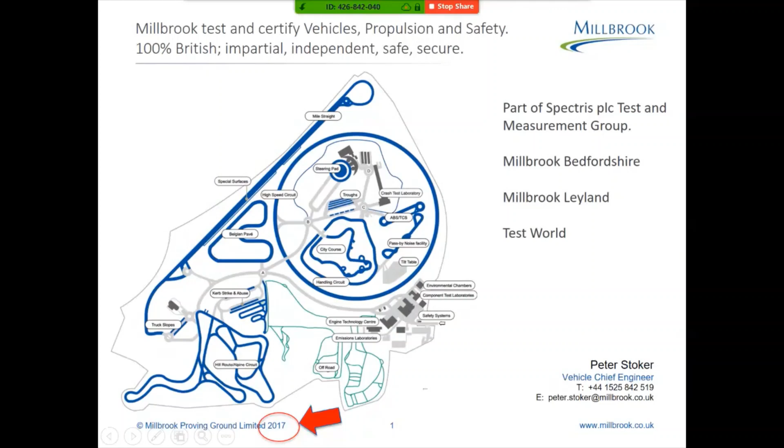So moving on, we had 2 significant government-supported testbeds on site at Millbrook. The first one, calendar-wise, was partially funded by the Centre for Connected and Autonomous Vehicles. It is a partnership in itself with the UK Atomic Energy Authority, and essentially sets up the UK's controlled urban testbed for connected and autonomous vehicles.

Within this deployment, we had some initial connectivity ideas where we would put together a series of enabled infrastructures being masts, power and fibre, essentially completing a lot of the civil work with a view to customers and infrastructure owners bringing their devices to put on top of that infrastructure.

However, the 5G Testbed and Trials program came along. We pitched at the event and were introduced to the guys from Airspan and asked if we'd like to be the location for the AutoAir project. And from small 2-slide presentations, mighty oaks tend to grow.

So in March 2018, we announced the participation of Millbrook in the consortium as the location for the 5G test infrastructure.

Things moved quite rapidly, and in July we hosted an inward visit from DCMS to look at some of the initial ideas and some of the advanced devices that were likely to be deployed. A very successful day in high summer of 2018, and from that we started to develop the site in earnest rather than just planning.

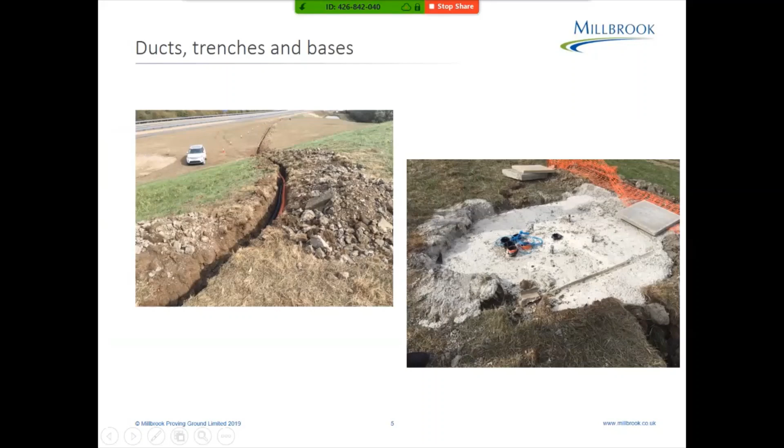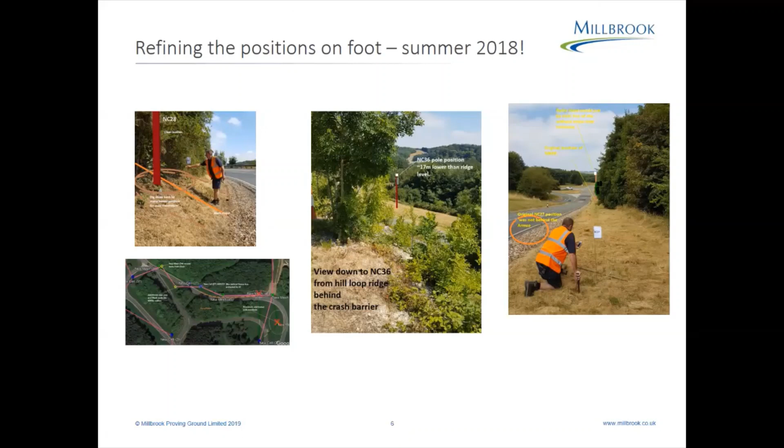Once some of the sites were in place, we looked at fine positioning rather than just what was on the radio plan, because we had to work with the architecture, the topography, and the tree lines that we had at Millbrook. We also had to look at safety considerations of siting masts in safe locations, not on the outside of bends where test vehicles could leave the track. It is a test track after all, and we didn't want any collisions with the surrounding telecoms infrastructure. So we tried to keep it as safe as possible, and this was a good part of working together to refine those positions.

In February 2019 we hosted a great launch event where we invited people from different industries, from transport and also from the technology sectors. We had a series of speakers, some really good high-level speakers, and ran demonstrations around the high-speed bowl at Millbrook. There were some great video feeds that went on to make BBC News and lots of publications, and we've used it in dissemination events ever since. There's a lot written about this demonstration day, which I won't repeat here.

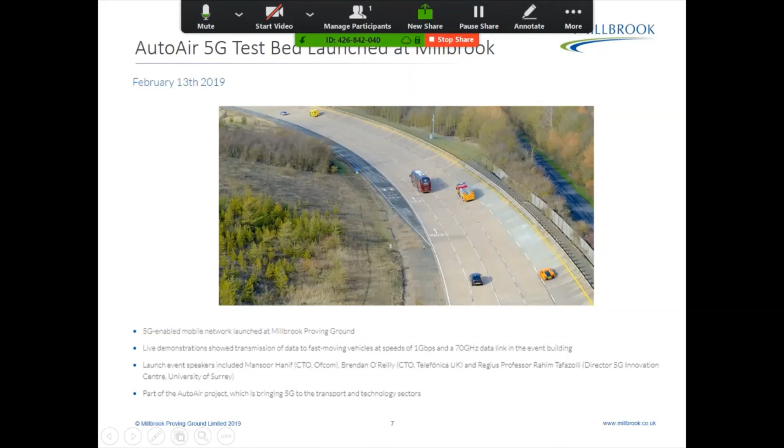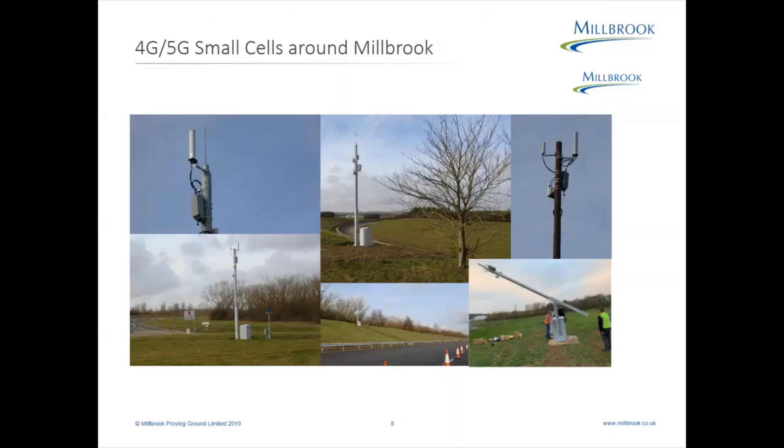Here we can see a selection of the small cells positioned around the site at Millbrook. The metal masts are essentially on the flat area that I explained earlier. The wooden posts we deployed into the hill area, and they blend very well into the agricultural background. The masts are tiltable for easy access, so if any devices are changed or people want to bring new devices, they can be added to the masts in a fairly straightforward way.

So using the AutoAir network, Millbrook have developed this in-house ability to look at the data live, and we can stream this straight to the engineer's desktop in the office. We can show it to customers in a confidential conference room, and obviously we can record it as well.

So in this way we can do plausibility checks on sensors, and we can keep a live eye on vehicles that are driving around. We can raise any flags if there's any issues also. So this has been very useful to us and now forms mainstream vehicle testing. So we're doing this on durability vehicles and on customer measured vehicles as they drive around on unique tests.

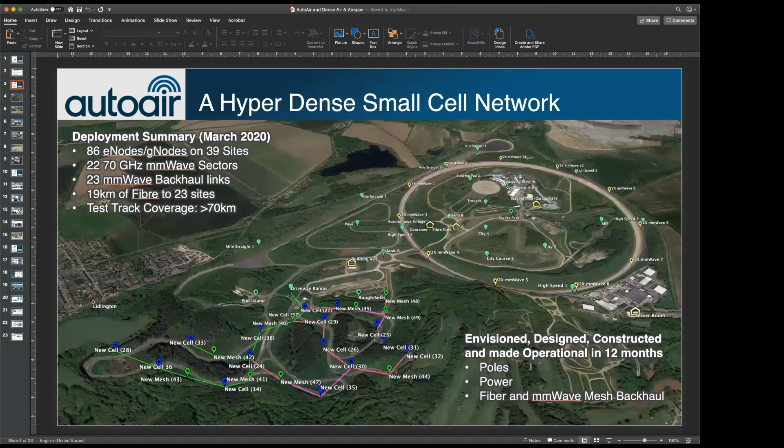So what did we build? I think the first thing to remember is that we went to a real greenfield site. There was extremely poor mobile coverage available at the Millbrook Proving Ground. There was basically just one EE macro cell.

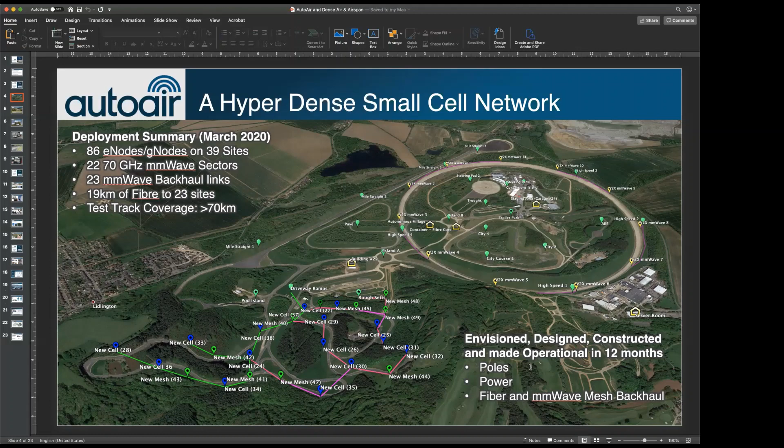And what we built there over basically the first 12 months of the project was a hyperdense small cell network. The final counts were 86 gNodeBs at 39 locations, 22 mmWave sectors around the high-speed bowl done by Blu Wireless, and 23 mmWave backhaul links across the site. We actually laid down 19 kilometers of fiber to connect 23 of those sites. Subsequently, fiber's been built out virtually to every location, providing, apart from the off-road course, pretty much complete coverage of all of the test tracks that Millbrook has.

And at Millbrook, we built two types of infrastructure. One infrastructure was in the 2.3 gigahertz band, and one infrastructure was in the 3.5 gig band, which was our focus on 5G.

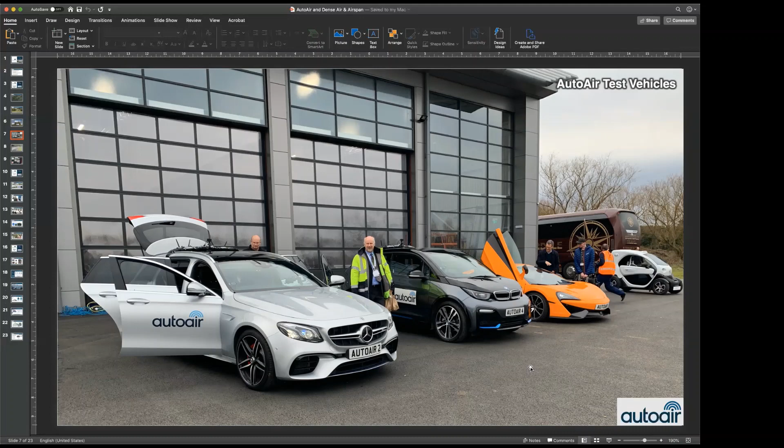This was a snapshot from the AutoAir demonstration day back in February, I think it was February the 12th, 2019, where we basically did a series of active demonstrations to show the capabilities of the network. During that day, we put lots of people around the track in coach loads to show some of the interesting use cases that can be achieved when you deliver hyperconnectivity to connected and autonomous vehicles.

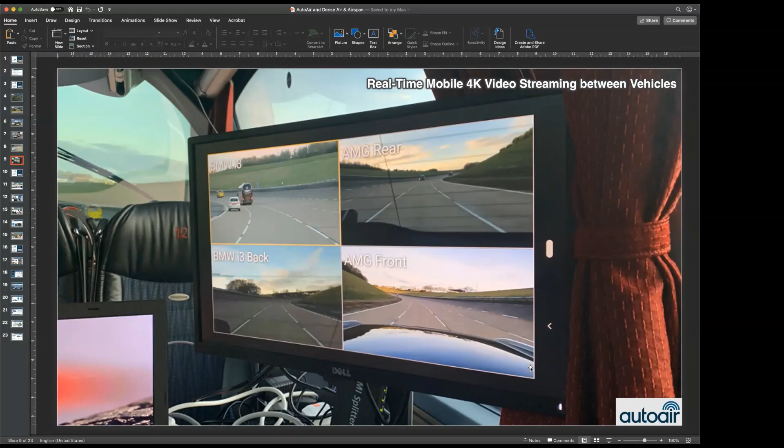One of the key showcases was to really show that if we can in real time share information between connected autonomous vehicles, we can make better choices. You can see around the bend ahead, which is the example showing on the screen here. So what did we achieve?

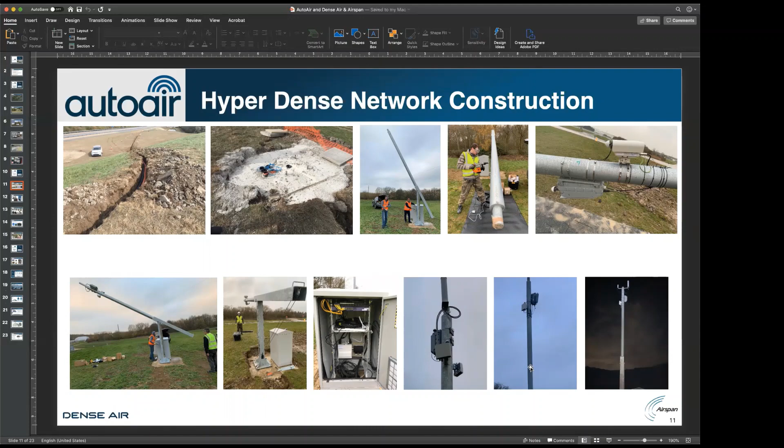Well, I think the key thing is there were lots of lessons learned. Constructing the network was not trivial. We did this across a winter period mainly, and it was pretty difficult, but it was possible to do that. We definitely accelerated the R&D programs, both inside of Airspan networks and Dense Air.

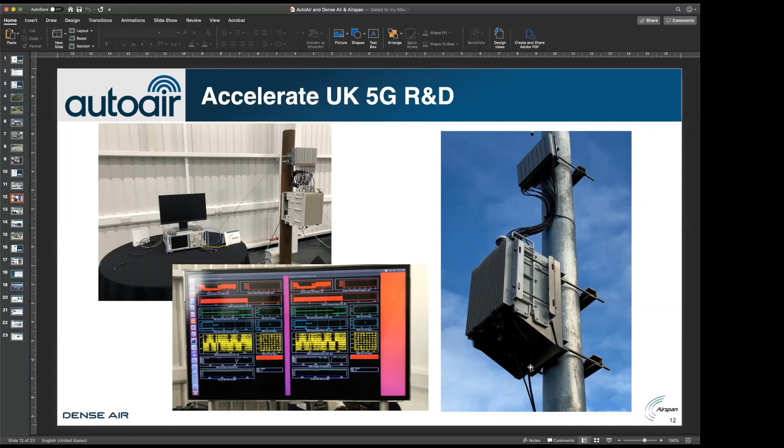We built a prototype gNodeB, which was used as a platform to learn many things about the commercial products that Airspan Networks will subsequently offer in the 5G space. And that took technologies from people like the University of Surrey and their beamforming technologies and married it with the hardware and software platforms that Airspan Networks does, and that was a really big win.

We built a neutral host core. A neutral host core is something where we constructed a network whereby you could have a single network providing both public service and private services. So private network connectivity for manufacturers of CAVs and subsystems to come and test with, and also a public network that, as we'll explain, is something that O2 then built out.

Using millimeter wave for deploying Open RAN backhaul, and Open RAN backhaul is something I'll talk about in a moment, but it's next generation 5G architectures where we disaggregate and break up a traditional base station gNodeB, eNodeB into constituent parts. We showed that we could use those millimeter wave technologies to build networks in new ways, ways that we're going to increasingly leverage as 5G comes, as 5G infrastructure is built out in the UK and elsewhere.

One of the best days of the project was when we all got together and managed to do a whole series of demonstrations to a very large audience from both the CAV industry and the telecoms industry, showing how if you put these two industries together, what synergy there is. We've got some connectivity technology that I think opened the eyes of many people that day to show what was possible.

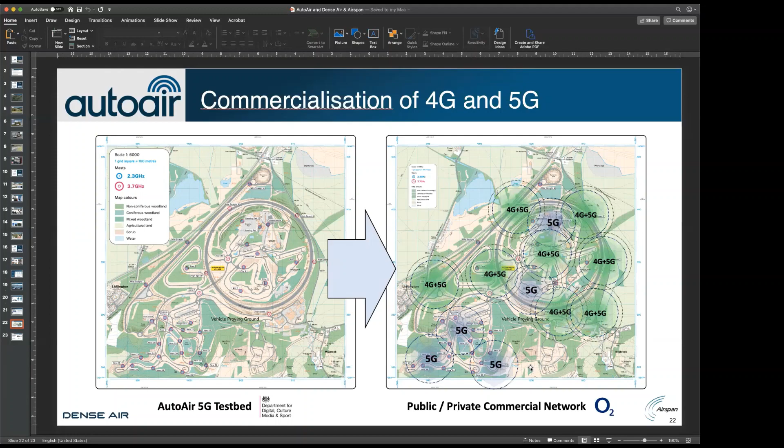In conclusion, this was an amazing collaboration with a whole bunch of companies. It is quite remarkable how well we all worked together as a team. There was a massive amount of innovation during the project, and new kinds of conversations, brokered by Millbrook itself, allowing us many more interactions between both the CAV industry and the telecoms industry.

And it led to this unique partnership at the end of the project, whereby O2, Millbrook and DCMS will continue to build, operate and maintain this network over the next 3 years at least. So with that, I'll stop and say it was a great experience, and speaking for Dense Air and Airspan, we're very keen to continue this kind of arrangement in the future.

Good morning, my name is Mark Barrett. I'm with Blu Wireless Technology. We're one of the partners in the AutoAir project, and this presentation concerns our contribution to the project regarding 5G mmWave for transport applications.

Before I start, just a few words on Blu Wireless Technology. We're a UK SME based in Bristol, founded in 2009. We focus on deep technology development for mmWave applications, particularly regarding the 57 to 71 gigahertz license-exempt spectrum, which we exploit using the IEEE 802.11ad standard.

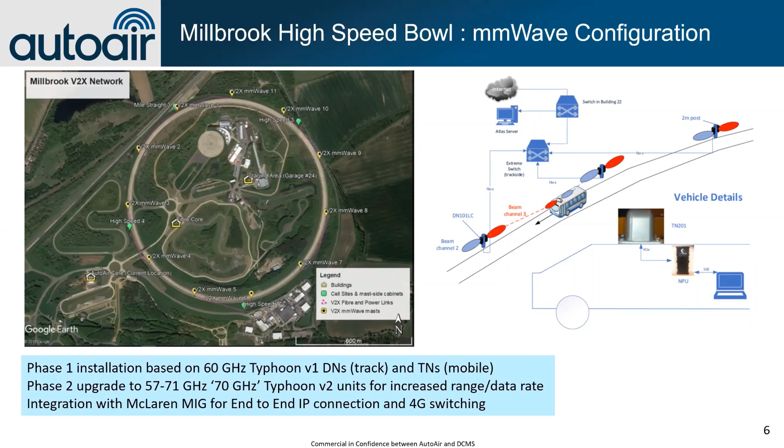So here's some photographs of the installation, taken in the summer of 2019. On the right-hand side, you can see one of the latest Typhoon DN101LC units. The phased array antenna sits behind the Blu Wireless logo. We're using beamforming to make the active connections as the vehicle moves around the track. The modem and the network processor, which is a Linux-based software-defined computer, sits inside the box. We have power supplies and the data connection, terminated in this box at the bottom right-hand corner. You can see the two radios looking up and down the track in this shot.

Then on the roof of the car, we have what we call the TN, short for terminal node unit. Again, this is two radios, front and back. And then we have a high-speed PCI digital connection into a network processor, which sits inside the vehicle, rather similar in size to the unit on the right-hand side.

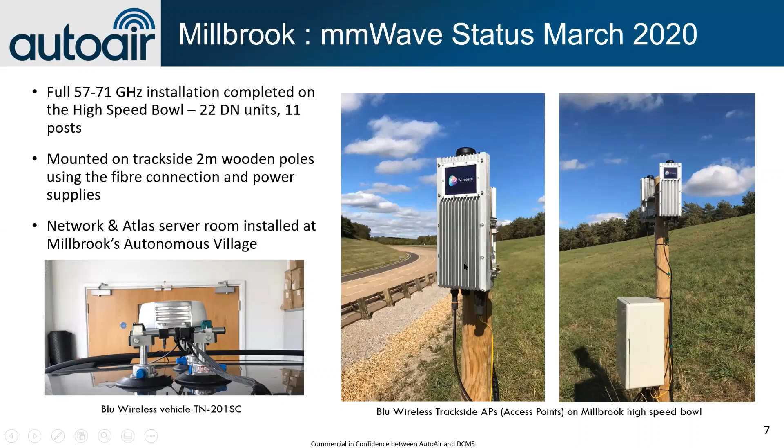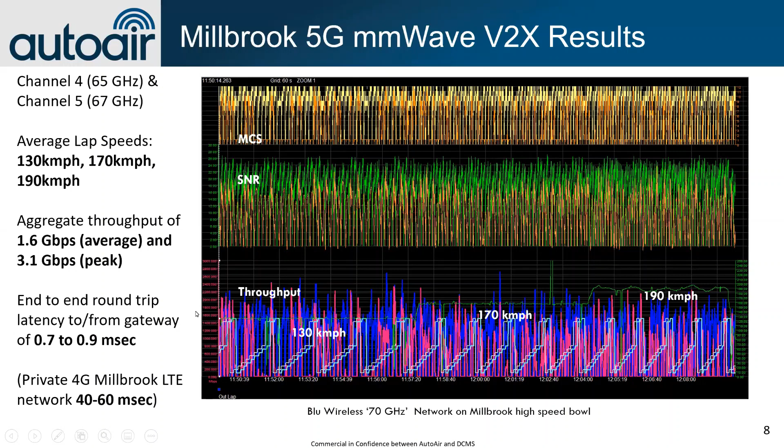As regards McLaren, this is an example of integration with their aggregation product they call the MIG. This allows multiple data streams to be aggregated end-to-end, including from other data sources such as LTE, and it's typically used in a rail environment to provide on-train Wi-Fi passenger data services.

In this particular instance, we're exploring the integration and the upper end of the performance this solution can deliver. We also used it to connect a standard Wi-Fi access point so we can do end-to-end demonstrations and throughput measurements. This version is a 1 gigabit Ethernet wide connection, so it's limited to typically 800 megabits of net data. McLaren are working on the next generation, which will upgrade that to 10 gig to improve the speed still further.

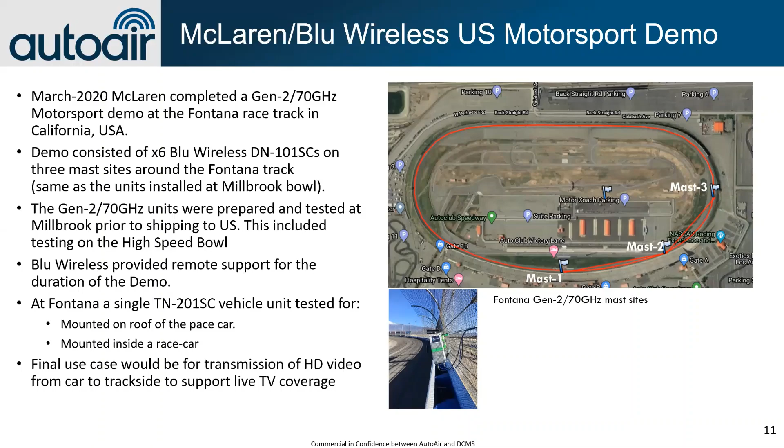Moving on to rail, this is not strictly speaking part of the AutoAir project, but it is extremely relevant in that we at Blu Wireless have been using the AutoAir project as a development test vehicle to improve, validate, and harden our technology for rail applications. As I mentioned at the beginning, we're working with First Group, and this talks about the track-to-train rail 5G technology we're developing.

In terms of motivation, what rail passengers want is much improved Wi-Fi. Anybody who's travelled on UK trains will have seen pretty poor performance on the in-train service, and typically trains today enjoy maybe 10 to 20 megabits per train, whereas the demand is projected to exceed 1 gigabit per train by 2025, if not sooner.

There was a report by Ofcom to the DCMS on how to improve rail connectivity, which recommended using mmWave to improve that. So that's essentially what we're doing. We're executing on that vision, using license-exempt mmWave, which means First Group don't have to pay a license to the government to use that spectrum, and also they can dedicate the network strictly to their application only and not share it with others through a mobile network connection.

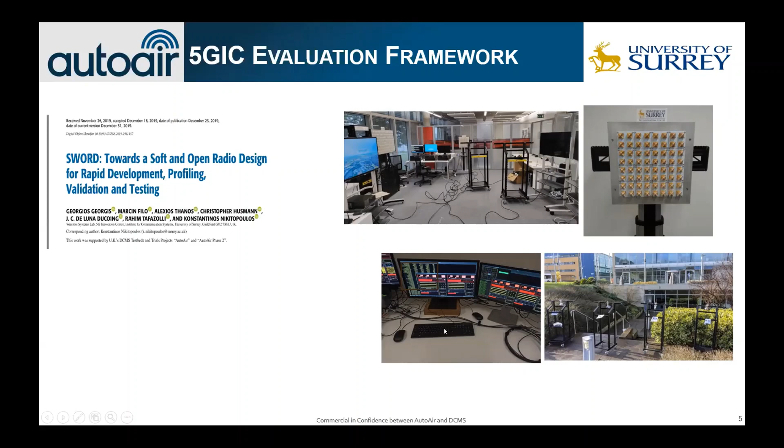The evaluation platform is 3GPP standard compliant and is quite flexible for testing and validation of breakthrough technologies. It supports different modes of operation for various applications: emulation, near real-time over-the-air, or real-time over-the-air.

It's modular, built on commercial off-the-shelf devices with software-defined radios and general-purpose processors, with different profiling for accurate execution and measurement of DSP functions.

The capability of the platform: at the moment we have developed 3 different beamforming algorithms - maximum ratio transmission and combining, zero forcing, as well as the 5GIC nonlinear MIMO solution. It can be configured for single user or multi-user MIMO system, up to 4 user equipment, and can be extended to 8 user equipments.

Multiple transmission and receiver antennas, up to 16 transceiver antennas, and a built-in time division duplex calibration procedure, which can calibrate up to a 16 antenna system.

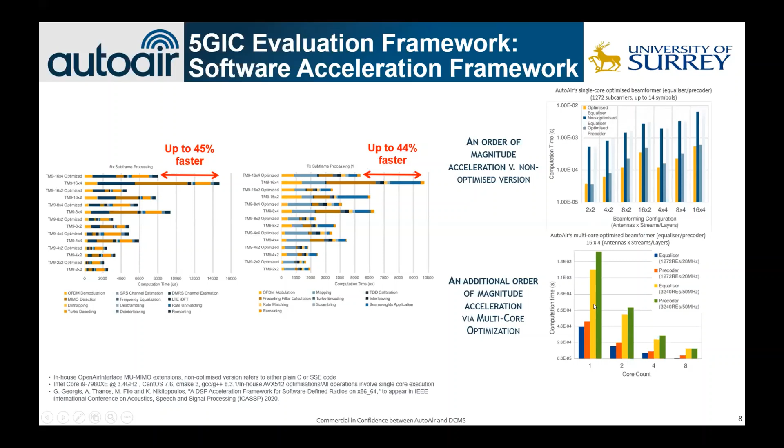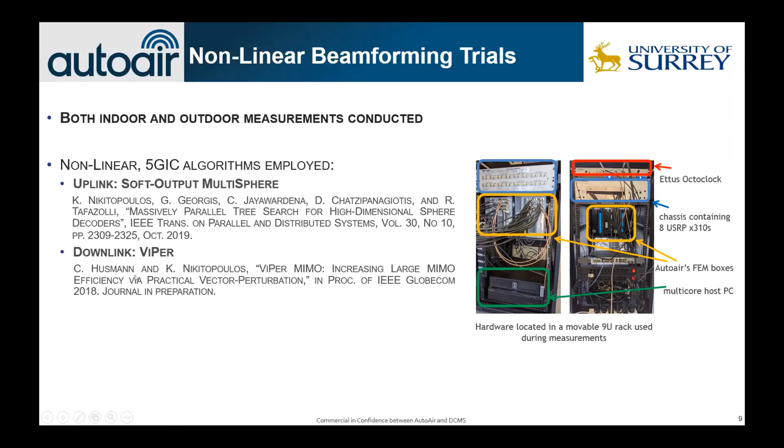The test was carried out indoor as well as outdoor, and you can see the setup of the equipment in the racks for indoor and outdoor. The nonlinear 5GIC algorithm employed uses uplink soft output multi-sphere, as well as downlink ViPer algorithm, which has all been published and is available in literature.

Similarly for 8x4 uplink configuration, on the downlink 4x4 again we have substantial gains up to 100%, and also for 8x4 on the downlink side.

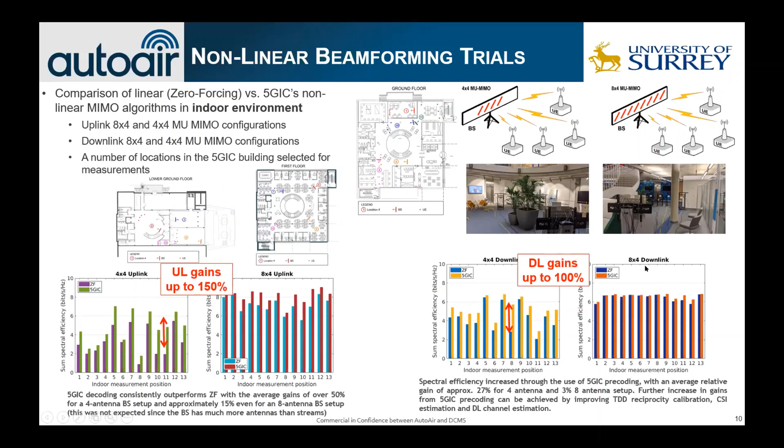For the outdoor environment, again we achieve substantial gains for 8x4 and 4x4 multi-user MIMO configuration. On the uplink side, 4x4 gives 90% gains, and on the downlink side, 260% compared with the state of the art and compared with the zero forcing algorithm.

Last, I would like to thank all the team at 5GIC, which is led by Dr. Konstantinos Nikitopoulos, and the team members, the main team members, and many people involved in the development and testing of the platform.

Dr. Georgios, Marcin Filo, Christopher Husmann, Jayawardena, and De Luna Ducoing, and Alex Thanos.

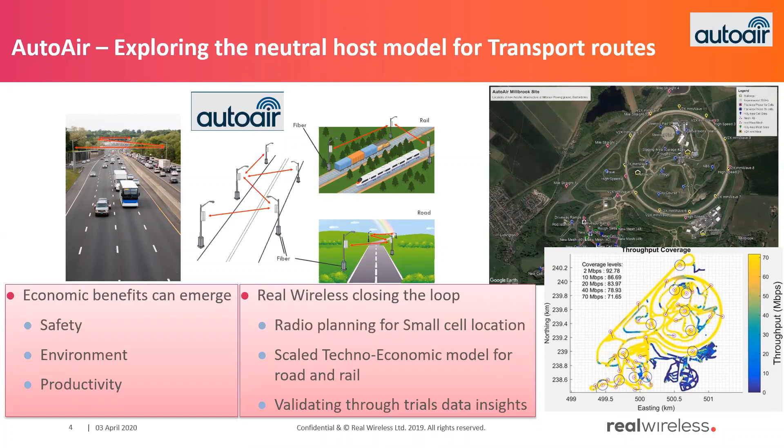The neutral host platform is evolving over time from a passive model, the DAS or distributed antenna system like architectures of old, into much more of an active system model where the neutral host may deploy small cells and other technologies to support the extension of mobile operators' coverage, providing edge or close-to-deployment capabilities that go beyond passive deployment. A lot of the motivation for that comes through analysis in various forums, creating what we call a business enablement layer which can support new applications, and that active architecture neutral host platform allows for the realization of some of those needs.

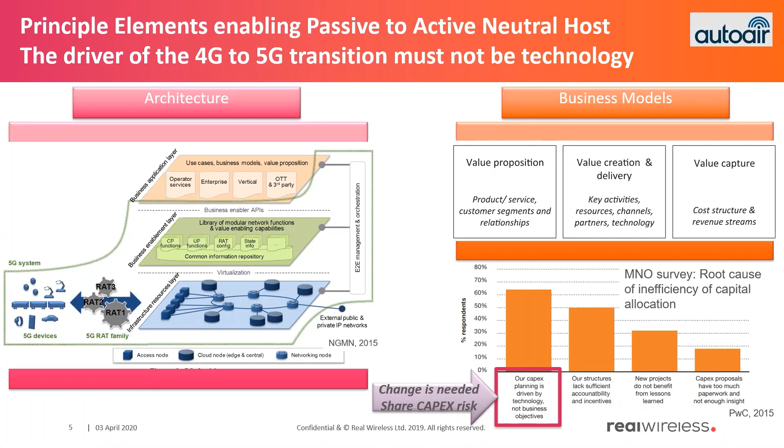The challenge for mobile operators, becoming greater as time goes by, is the capital risk they see in their business. This is a study we're referencing from a number of years ago, where it was already recognized through discussions with operators that the CapEx-based, technology-driven model is starting to cause some inefficiency in capital allocation seen in the industry. A way to share the capital risk is necessary for the operators.

We wanted to look at value creation and created 4 categories of use cases: safety, infotainment - probably well understood at this stage, with new use cases emerging all the time, and infotainment in particular is potentially a high traffic demand creating category - and diagnostics and maintenance and fleet services, which create interesting new use cases and ecosystems of companies around logistics and insurance that could well create value over time.

Those use cases sitting within those categories feed into a model that allows us to map through from representative views of the roads in the UK, creating a demand density that allows us to create a view of the small cells that may be required and the capacity capability needed to address different traffic demand scenarios.